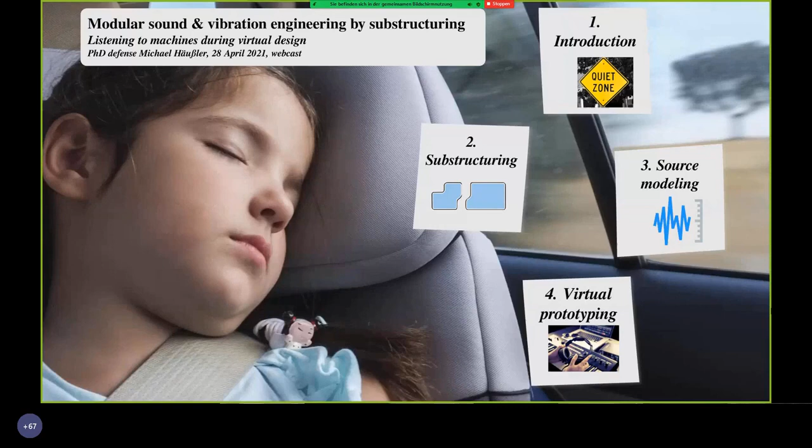Thanks for the kind introduction, and welcome to my PhD defense talk, which is about modular sound and vibration engineering.

If you look at the background picture here, this nicely conveys what we want our cars to be like. They should be our comfort zone, our safe space, so we can enjoy the ride, and eventually our kids can sleep. What we don't want is to be disturbed by any background noise of machines running in the car.

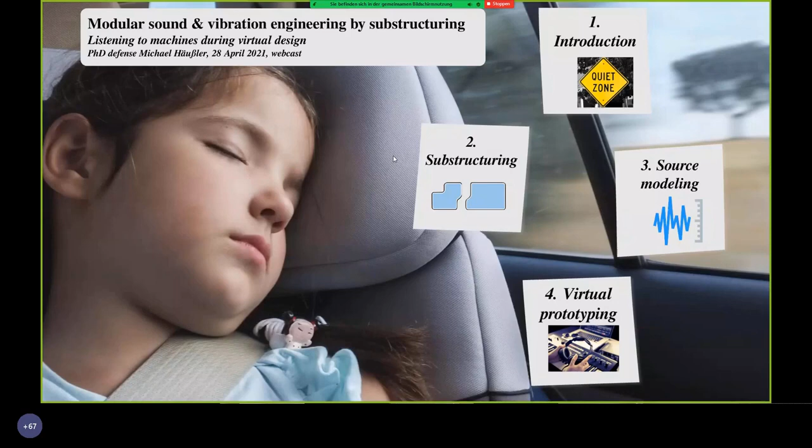I'm going to give you a quick listening example of that now.

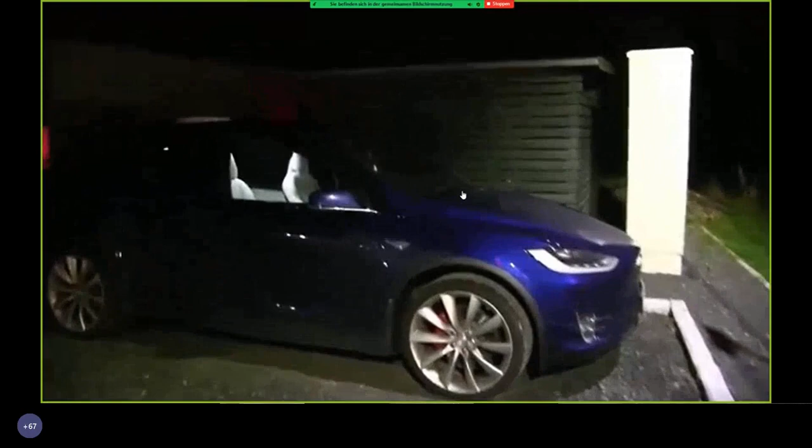Hi, I'm at the supercharger in Elverum, and right now I'm getting about 100 kilowatts. And you hear this noise? This is completely normal because we are receiving so much energy so fast. So the compressor are working on high gear. You can actually feel the heat coming out here. Yeah.

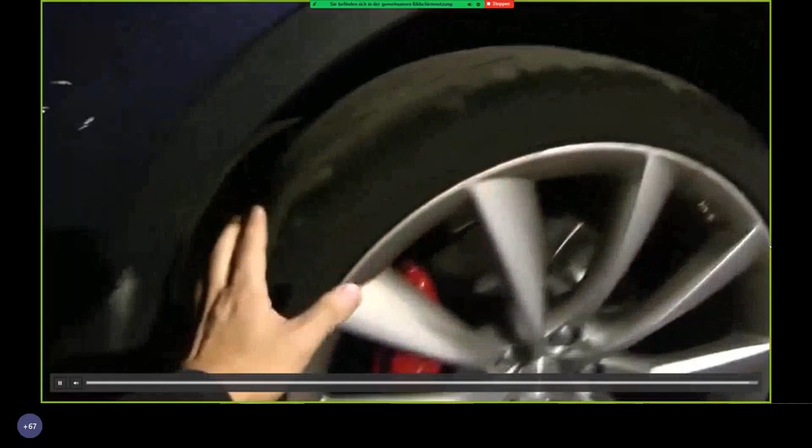So this YouTuber is perfectly right. Unfortunately, the cell heating rate goes up quadratically with the current when charging or discharging the batteries, so we kind of need this component in every vehicle.

Now the art of acoustic engineering is really to think about how do we connect this thing to the vehicle and isolate the sound in order to not hear it. But it goes further, because you cannot just add excess material which is not required. If you think about acoustic countermeasures, you could think about intermediate masses and sound insulation capsules, but they all add weight, costs, and excess resources that you need.

If you then think about the yearly production rates of popular vehicles, you can see that this is actually an important point to consider, and to get your models right for getting a good design.

To make things concrete, I'm showing you here the setup of the virtual prototype, which I'm going to show you at the very end in my PhD thesis. This was a climate compressor that was isolated from the vehicle with a double isolation, so you've got two sets of rubber bushings and an intermediate mass called a carrier in between.

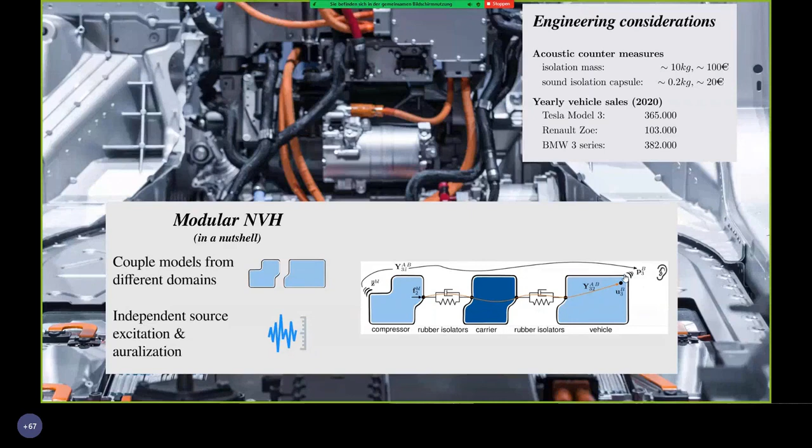What you really want to do is take individual component models, which you model with the most convenient approach, and virtually couple them together in order to predict the vibration and sound transfer path all the way up to the driver's ear. You also need an independent description of the source excitation of this component, which in this case is the compressor. This both transfers sound and vibration over the structural connection points and also over the airborne path by radiating directly from its housing. Then you want to do some signal processing in order to listen to your design virtually in the computer. This is what I'm going to explain in more detail now.

So let's jump into substructuring. Imagine you've got a model of structure A and structure B, and you want to couple them. There are really only two coupling conditions: you've got the vibrations and forces acting on the interface on structure A and structure B. To couple them, you have to ensure two coupling conditions — first, that they do the same vibrations on the interface, and that the forces acting on the interface are equal in magnitude, but

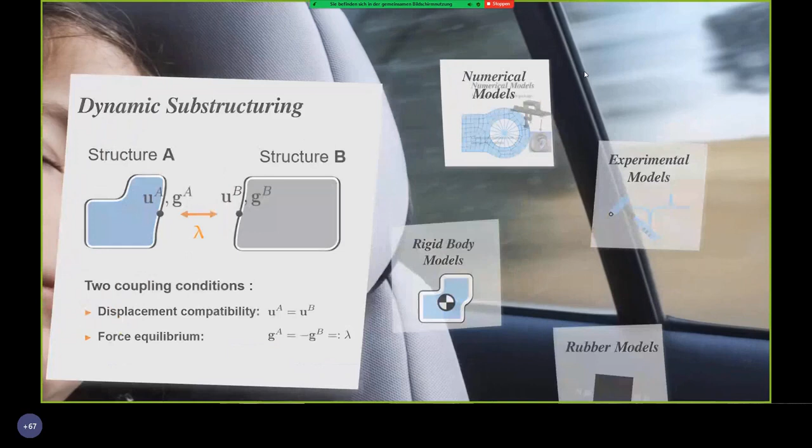opposite in sign. So this is really just Actio ist Reactio from Mr. Newton. This is not so difficult, but the question is really, how do I get a good model of any substructure? The first thing that comes to mind is a numerical model, and you can obtain a description of your components by any standard finite element or multi-body simulation package.

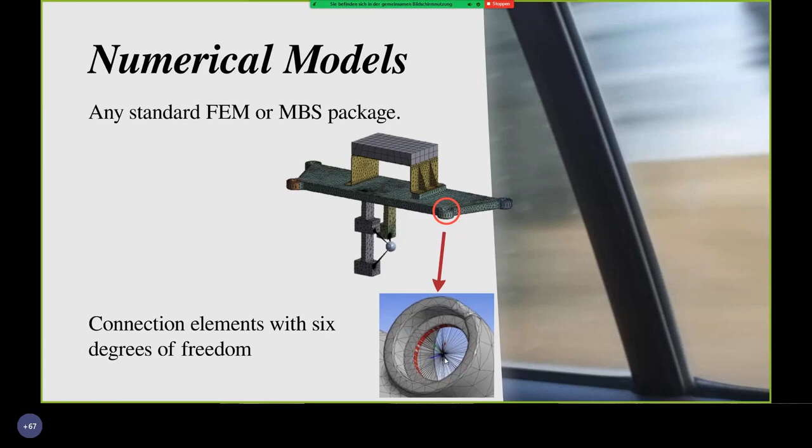As I've shown here in this example with a finite element model, you can take your connection points at the interfaces and place one of these rigid elements here. These are like virtual points in the middle of the connection, with 6 degrees of freedom, where you can enforce the coupling conditions with the next structure.

What you can also do, if you have a complex structure that's too difficult to model accurately, or you just don't have a model, is take an experimental model. This seems straightforward at first: just use vibration sensors and force sensors and measure the relation between forces and vibrations at the interface points. But to get a description you can couple to other models, we use something called the virtual point transformation, which is really key to most of the things I'm showing here.

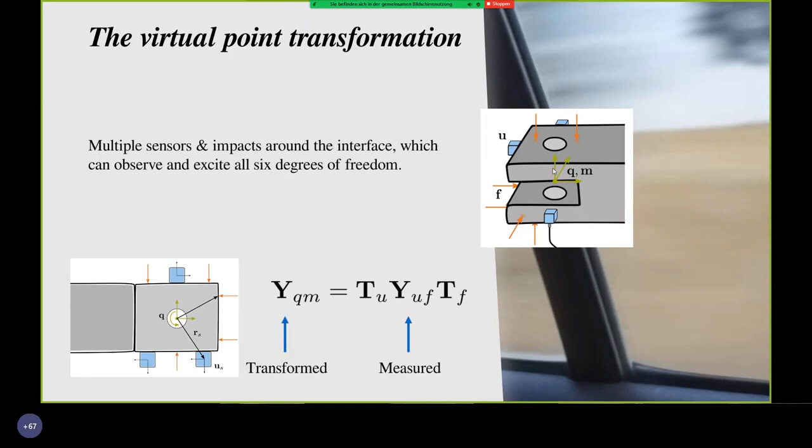So what you do is equip your connection points with a couple of sensors, perform a few impacts with your force-sensor-equipped impact hammer, and measure a transfer function. By knowing the geometry and position of your impacts and sensors, you can use transformation matrices to transform your measurements to a description at a virtual point in the middle of the connection point. This is then compatible again with, for example, your finite element model.

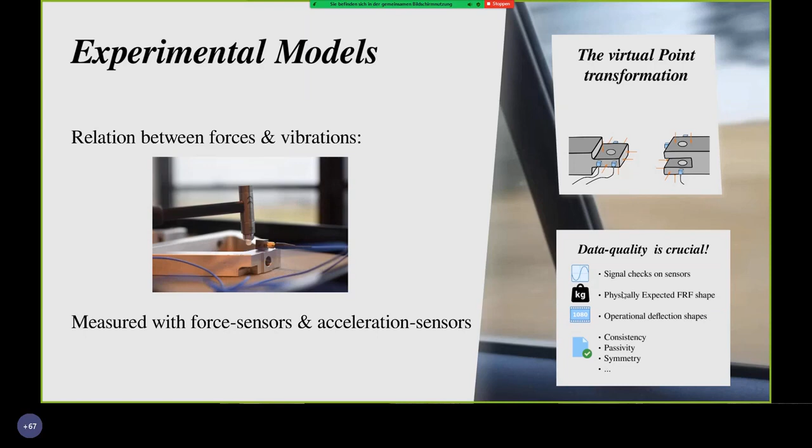The real catch, and what I want to stress, is that data quality is crucial. You want to do all the checks at your disposal to ensure you have an accurate experimental model — we've learned the hard way what can go wrong. But otherwise, this is a really handy modeling approach for a substructure, and rather quick if the structure already exists. What's even quicker, if you have a really simple structure in your transfer path that can be modeled as a rigid body, is to just go ahead and model it as one.

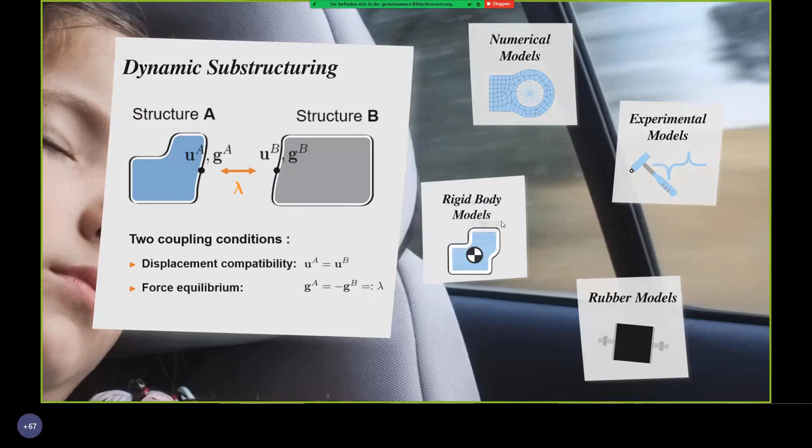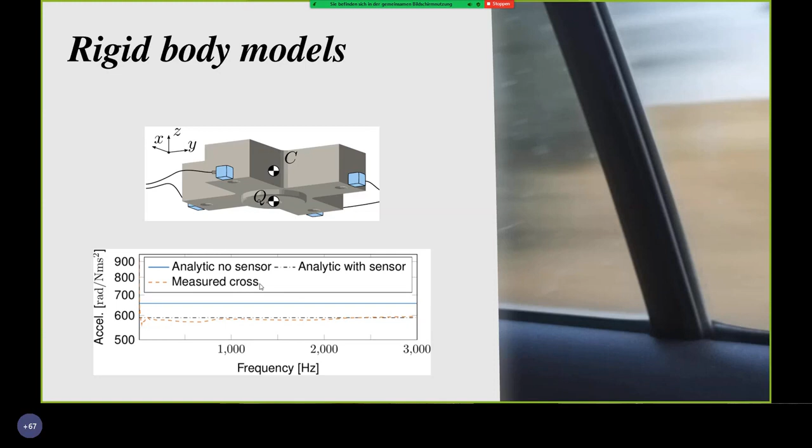Imagine one of these crosses here — they're basically rigid in your frequency range of interest. You just define a general coupling point on this cross, and we formulated the equations so they nicely fit into this substructuring framework. The only thing I wanted to stress is that it's important to also consider the added mass of these sensors. If you do this, you can get an almost perfect match between your rigid body model and a reference measurement. That turned out to be very handy for some simple structures, like these crosses you can use for testing.

And then lastly, you often have rubber isolators in your sound transmission path. Here it wasn't exactly clear to us how to model this at the beginning of my research project, because you have quite a few challenges with these rubber models.

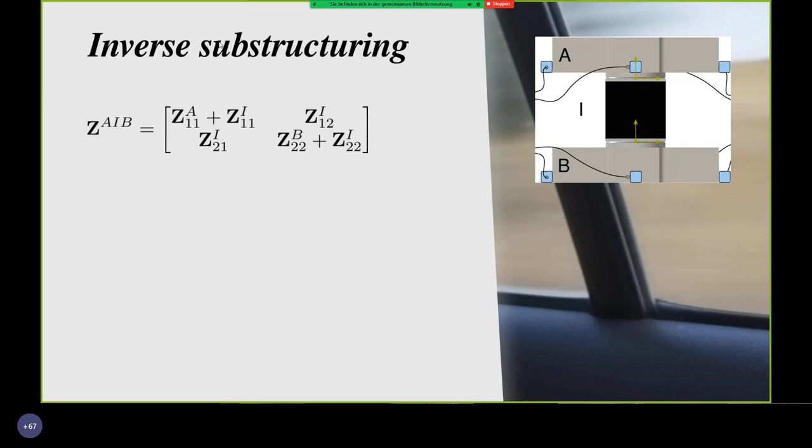One approach we found in the literature was called inverse substructuring, and the idea is quite simple. Imagine you take two of these crosses I've just shown you, attach them to your rubber bushing, perform your measurements on these crosses, and transform them to two virtual points with 6 degrees of freedom at either coupling point of the rubber bushing. You end up with a dynamic stiffness matrix of this assembly. Inverse substructuring uses the fact that the off-diagonal terms are only a property of the connection element, which is the rubber isolator.

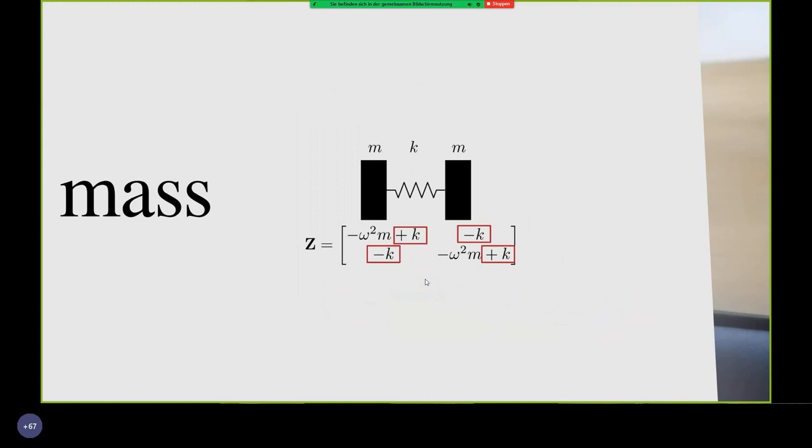To come up with a model for this full isolator, you assume a simple topology and negligible mass for the rubber isolator. To make things really simple, if you think of two masses connected by a spring and look at this dynamic stiffness matrix, you can see minus the stiffness on the off-diagonal, and then recreate the on-diagonal term you want. So basically, you make this simple topology, degree-of-freedom-to-degree-of-freedom connection assumption with negligible mass, and then build your rubber isolator model from that.

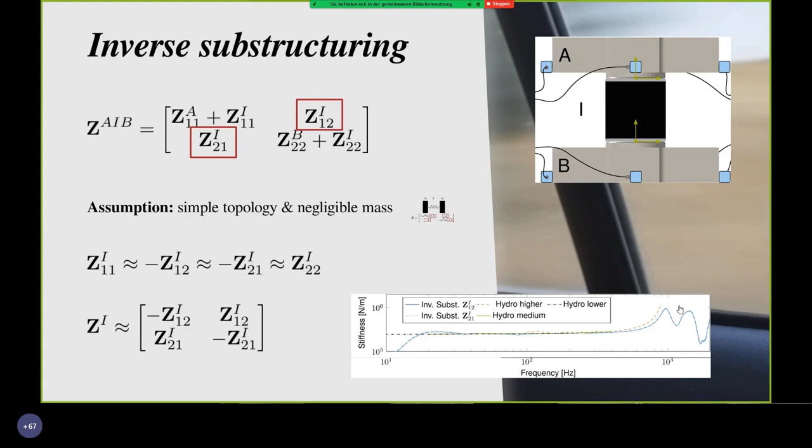If you look at these off-diagonal terms, which you can validate with measurements on a hydropulse measurement machine, you get a pretty accurate match in the determined stiffnesses. What's also interesting is that toward higher frequencies, you can see dynamic stiffening and weakening effects, which are due to internal continuum resonances in the rubber bushing. These cause problems sometimes with gearbox whining and electric motor sound — something we've already seen in other projects.

But as I said, you make quite a few assumptions here, so why not just go ahead and use full decoupling? As I've just said, we can model these crosses quite easily as rigid bodies, and we can then just decouple them from the measurement taken on the coupled assembly.

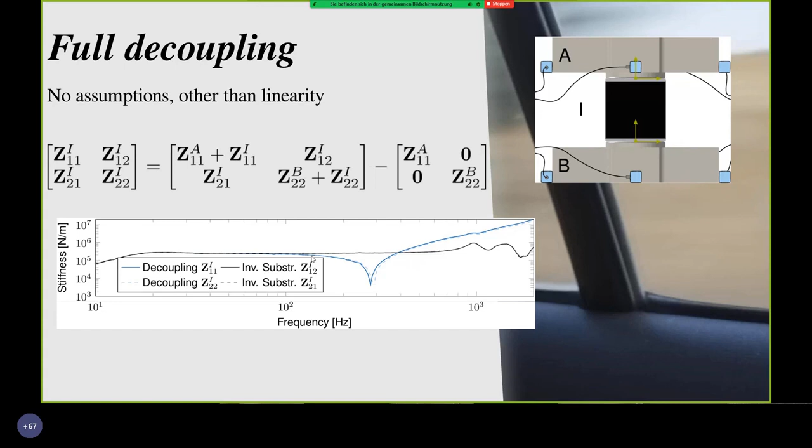And then we get the rubber bushing model, and we have no assumptions other than linearity. If you do that, you can look at these on-diagonal terms and compare them to the off-diagonal terms, which should be equal under the assumptions of inverse substructuring. But you can clearly see that this is only true up to an upper frequency limit, because after that...

...the mass effects of the rubber bushing kick in. But the important point is really to see how these models perform in substructuring.

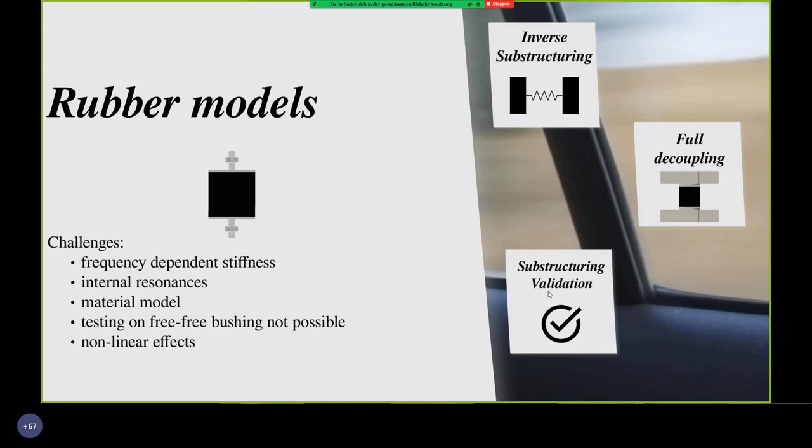So what we did is set up a small validation measurement where we used these bushing models for predicting the FRF of a new assembly. You can see that with this decoupling approach, you get an almost perfect match in your prediction with the reference measurement. And here, with this inverse substructuring approach, we've tested quite a few different variants of this method, but you can still never get it quite right.

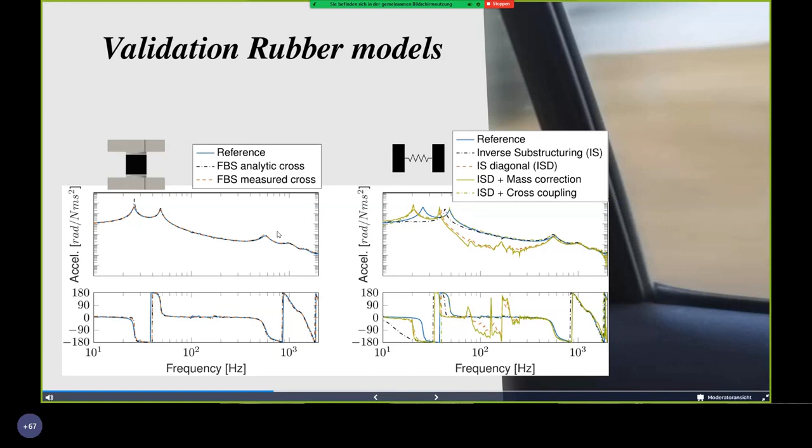So we were very happy with these results, and we use them a lot also in our daily practice and in the rest of this thesis.

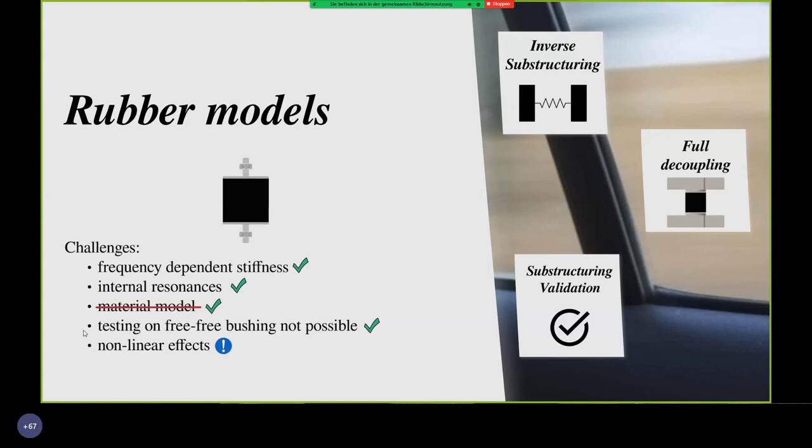So with these models, we've covered quite a few of the challenges. We include the frequency-dependent stiffness and internal resonances in the bushing. We got rid of the necessity to have a material model because we just took the component as it is and modeled it. The only thing that's missing now is nonlinear effects, but there is a lot to come by bright people working currently at the chair, also in this direction.

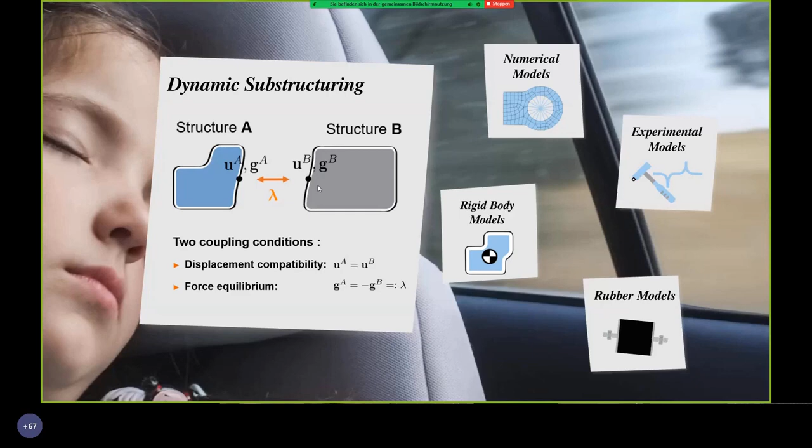But if we look again at the high-level picture, we've got quite a few models at our disposal, which we can couple to each other in order to simulate a complex transfer path in a vehicle. So the last thing missing is how we model the source excitation. And this is what I'm going to talk about now.

So what you have in your vehicle: you've got your source A, and it has some internal forces which are exciting the system, and these vibrations are transferred with the transfer function of the full assembly AB to sound and vibrations on your receiver. The problem is that these internal forces are first of all complex to model, so you've got maybe unknown parameters, or it's a supplier part where you don't have a model of.

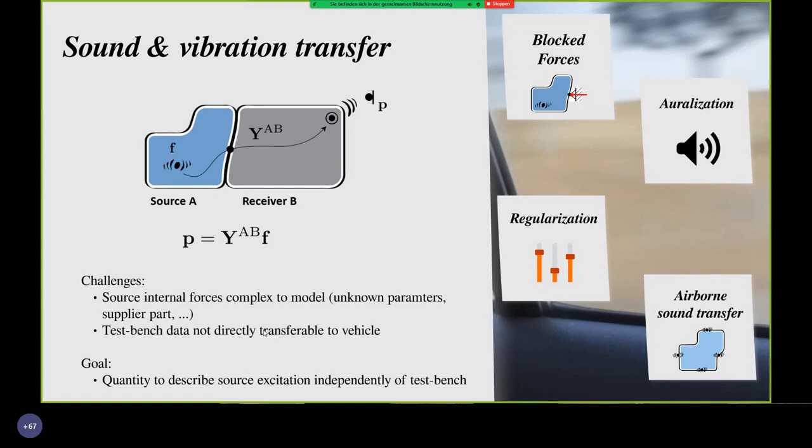And even if you take the component on a test bench, you need some sort of data processing to make these results transferable to what you're going to have in the final vehicle. So what you really want is an abstract quantity to describe the source excitation independently of the test bench. And this is where blocked forces come in.

I'm going to explain you in a nutshell what these blocked forces are. If you really think about them, these are the forces that, if your source is in operation, running this component, and if you would apply the blocked forces on the interface here, then they would block any vibration on the interface. So the interface is completely blocked, and therefore you would not have any vibration and sound left on the receiver.

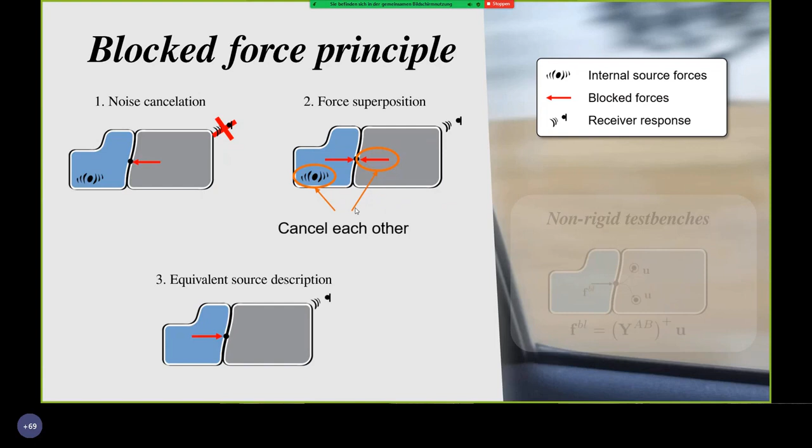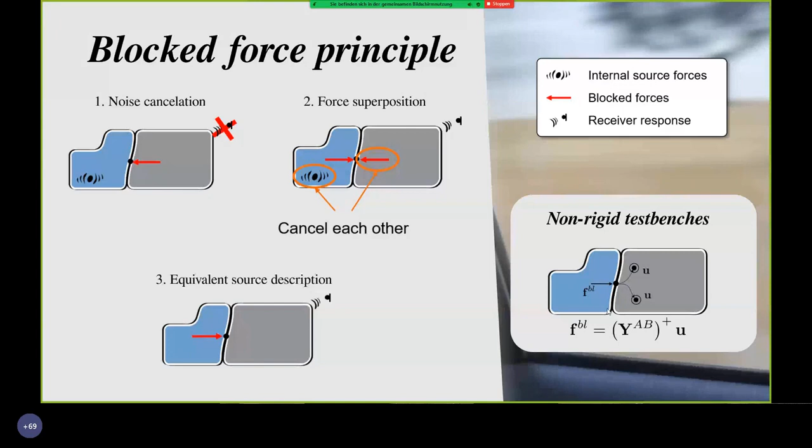Okay, so that helps in thinking why they work, but of course we can never build a really rigid test bench. So what you do in practice is attach your source to a flexible test bench, record the vibrations on this test bench, and then inversely compute what forces would have caused this vibration.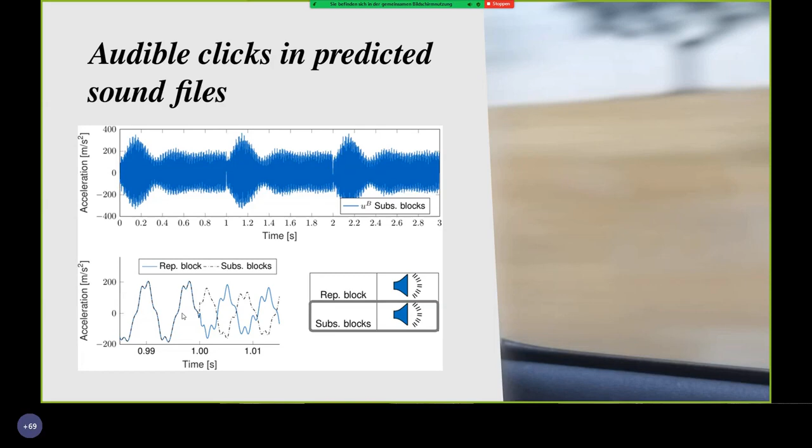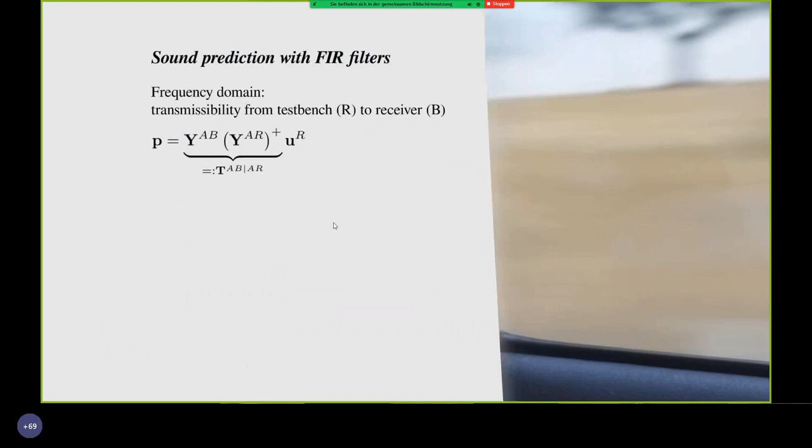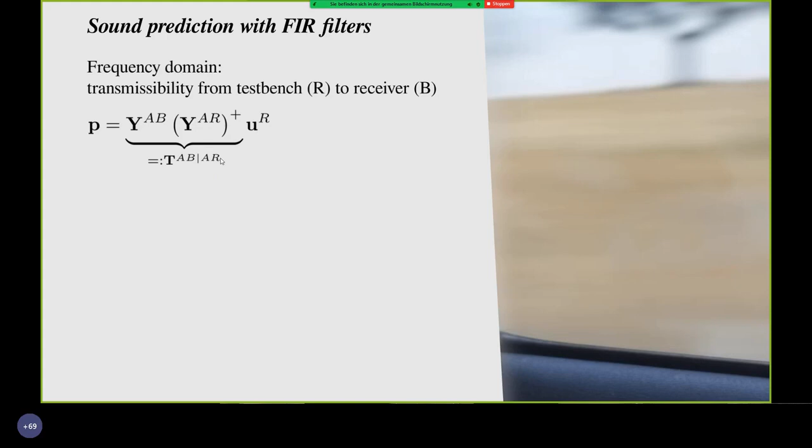So we have tested quite a few methods of how you could get rid of this. One that I'm going to show you here, which I think is generally well applicable, is that you take all the operations you have in the frequency domain for coming up with your prediction at the driver's ear and cast that into one transmissibility matrix. Then you transform this transmissibility matrix to the time domain, to a FIR filter.

And then I'm directly taking my recorded time signal from the test bench and convoluting it with this transmissibility matrix. Therefore, I end up with my sound predictions directly in the time domain, to which I can listen. Here you really don't make any assumptions about the nature of this excitation signal, other than that you have linear systems. And if you listen to that...

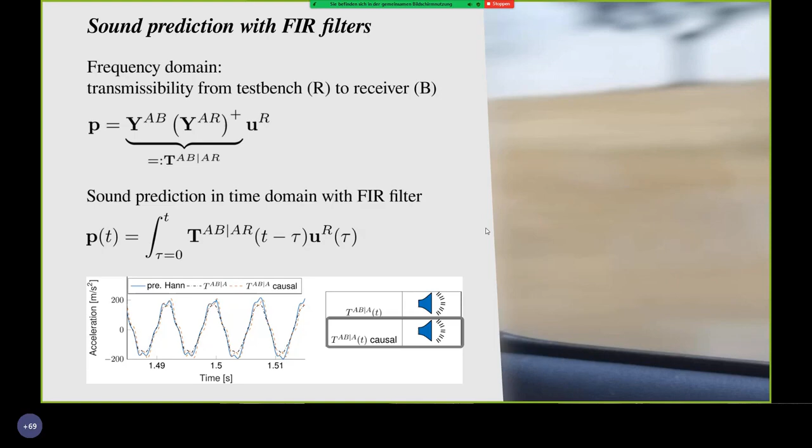You can hear that you got rid of these artifacts. All right, so now we know how to model our source and then listen to the predictions, but there's a last topic in order to have clean predictions, and this is the field of regularization.

Regularization is really concerned with this amplification of measurement noise that you have in this inverse computation of the force. So imagine this very simple system of just a spring, and you measure the vibration here at this point, and you want to infer what the force was that caused this vibration. But unfortunately, you also have some measurement noise in your vibration signal, so an error, e_u.

So the estimate that you have of this force is going to be made up of two components: first, the true force, which you want to identify, and then also this error component. And this is no problem as long as this error component is small compared to the true vibration.

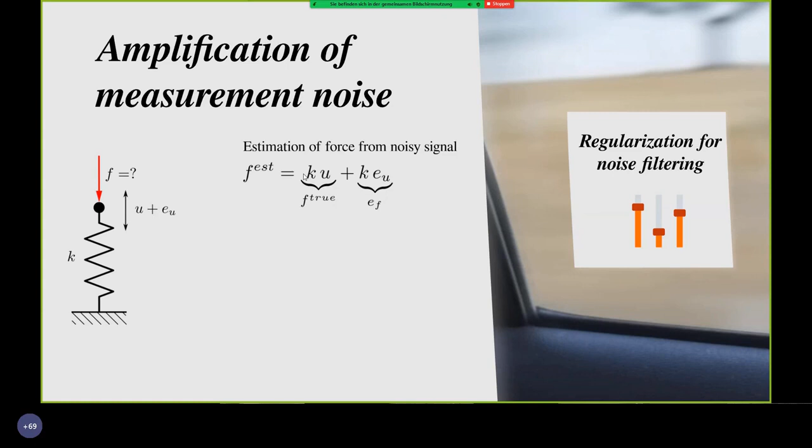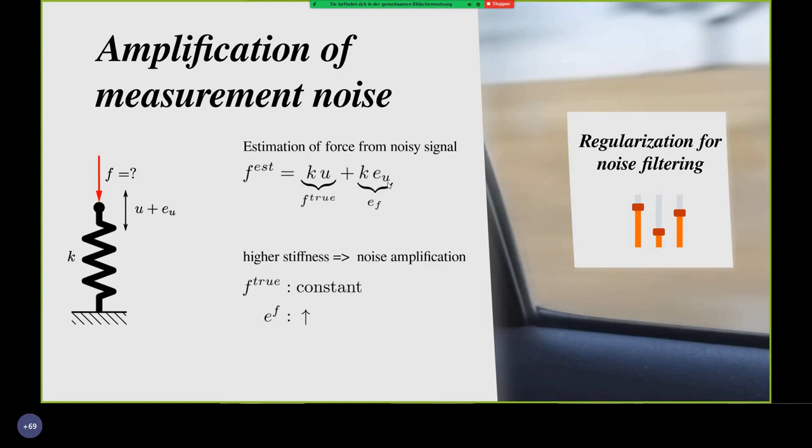But imagine you've got a very stiff system with a very stiff spring. Say your force stays constant, but the error or measurement noise in your vibration signal is typically independent of the overall level. So this error component in your computed forces increases quite a bit, and this can give problems which are actually audible in your predictions.

What regularization is doing is filtering the forces in these stiff directions. We've tested multiple methods for using this, and especially one where you use the signal to noise ratio for determining the filter factors turned out to work very well for the compressor. So let's listen to a validation measurement on a test bench.

All right, now let's listen to the regularized prediction. Now that sounds very similar to the validation measurement, but now let's listen to the standard inversion without regularization.

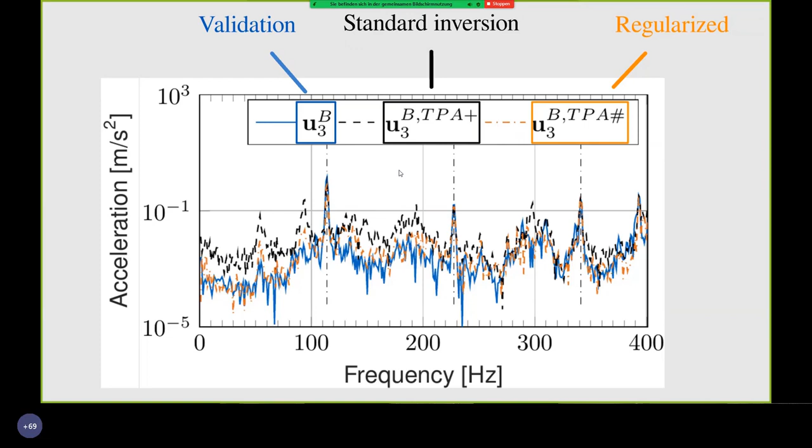So here you can hear a lot of background noise and rumbling, and this is really at the resonance frequencies of your receiver, this sound pollution that you hear. What really happens here is that you've basically amplified your measurement noise twice. You have once amplified it in the stiff directions of your test bench, and then just by chance, because you're unlucky, you hit a resonance frequency of your new receiver and amplify the measurement noise again. And this can yield spoiled sound predictions.

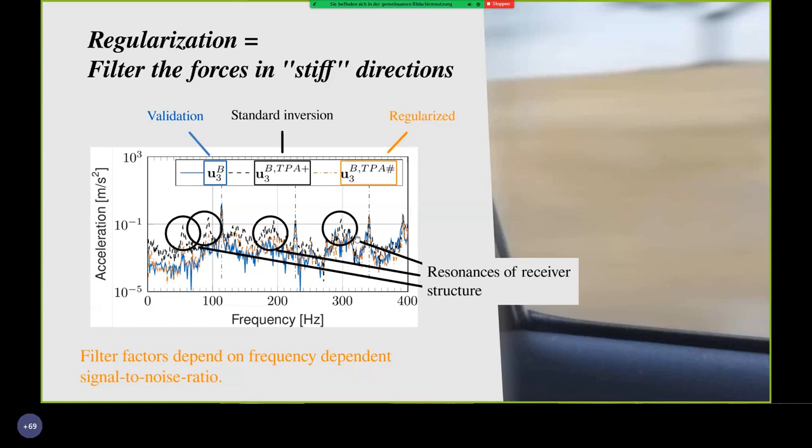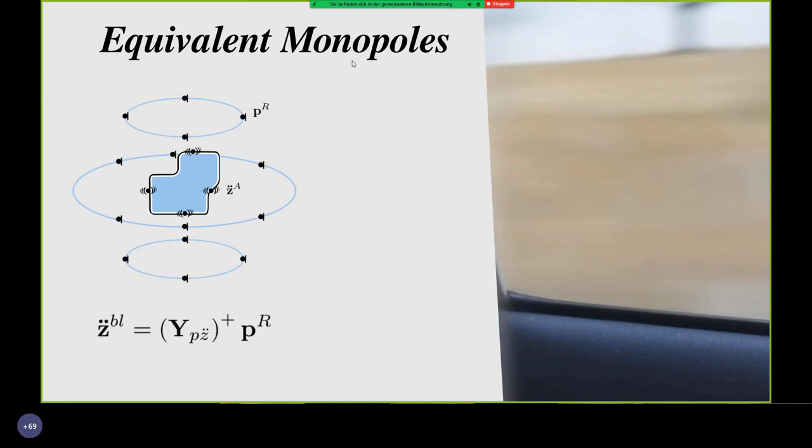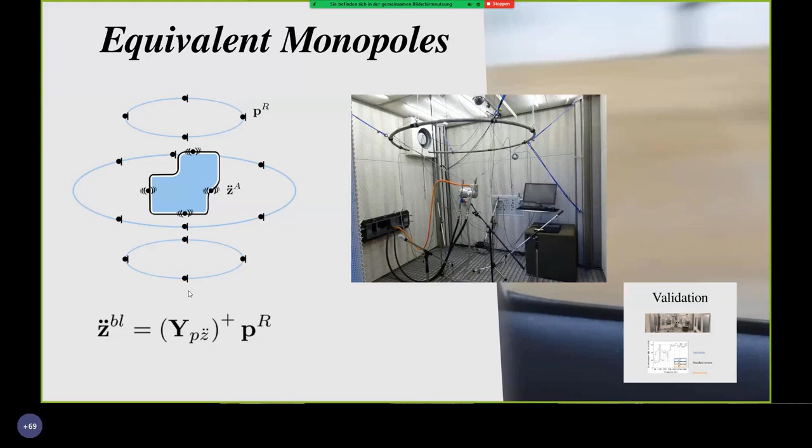All right, so this was insightful and good. And then the last thing, I'm going to go over this very quickly: since the e-compressor is radiating sound also directly to the air from its housing, we described this transfer path with equivalent monopoles. So basically what you do is you hang up your source component, which is surrounded by many microphones, and then you also inversely compute an equivalent source quantity describing this airborne path.

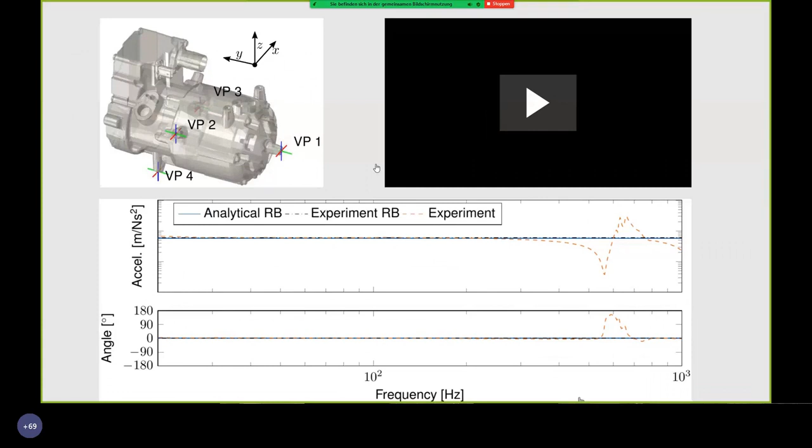Okay, and now if we look at this, we're really finished with the source description, and together with substructuring, we can now really go to the fun part where you use this in a virtual prototyping approach. So here again is this design of an electric vehicle prototype where the compressor is doubly isolated from the vehicle. I'm now going to go quickly into the individual models we used for modeling this transfer path. The compressor was described just as a rigid body, so I'm showing this here in a small video.

So you can see here that you have these 4 connection points where the compressor is attached to rubber bushings, but in essence, this is just a rigid body. The rubber isolators are described with the method that I've just explained you before.

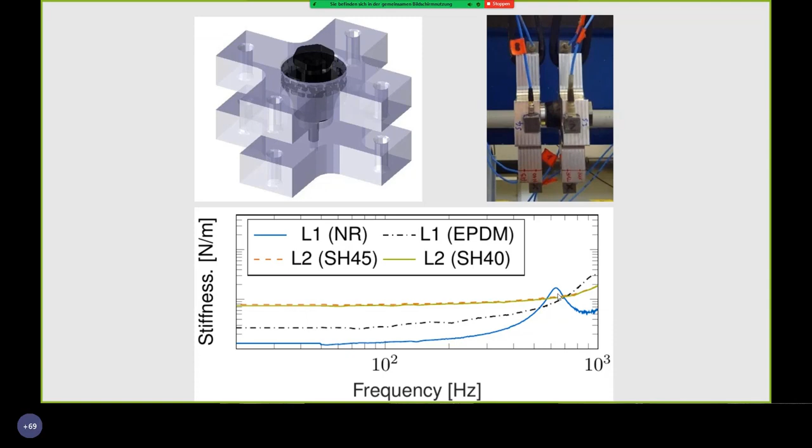These are 4 different variants for the potential rubber isolators that we could use with different materials. You can see here what is very interesting, one of these internal anti-resonances, where one rubber bushing, which is supposed to be the most flexible one, is actually stiffer than all the others. For this intermediate mass, we used a finite element model.

The second stage of rubber isolators were described with just the same approach as the previous ones. And for the vehicle, we used an experimental model.

And then we've also measured the transfer path to sound pressures and microphones in the vehicle. The only thing which is noteworthy to mention here is that you need to consider the added mass of these crosses, because especially at higher frequencies, if you don't decouple this mass, then you get quite different and actually wrong transfer functions in your model.

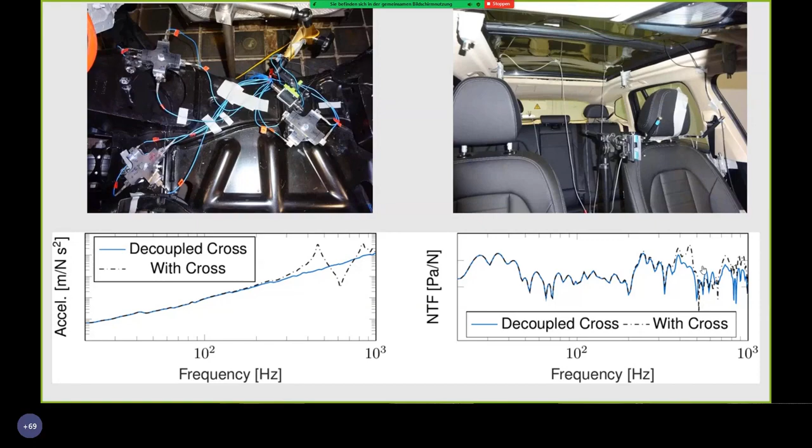All right. So with all these components, you can see that this is actually quite flexible. You can choose whatever approach fits your design best for the individual components. And now we can make predictions for what the transfer function all the way from the compressor to the driver's ear is going to look like.

And we've tested this design physically. And what you see here is a validation measurement for an input on the compressor and an output on this intermediate mass. And what you can see here is that the substructuring result fits the reference measurement quite good. Only here at higher frequencies, and I've also plotted the coherence of the reference measurement down here.

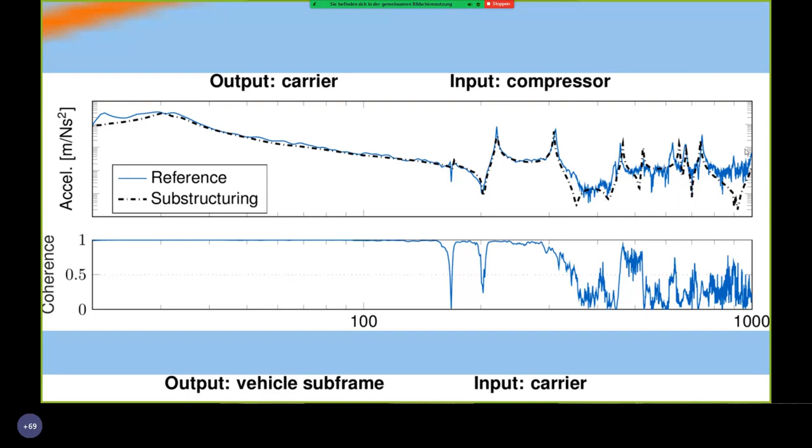You can see that, well, you cannot apply enough input energy to your system to really measure this transfer function. And with substructuring, since you've modeled all your components individually or measured them with a good signal to noise ratio, you can actually make predictions at frequency ranges which were previously not even possible to obtain, even if you have a full prototype. So that was very interesting.

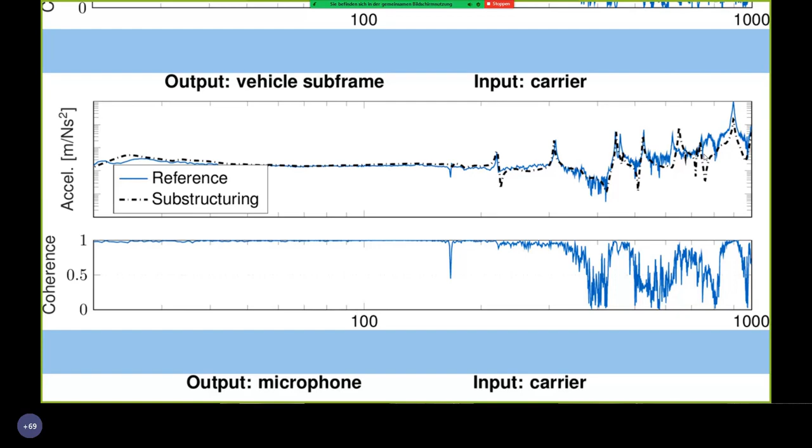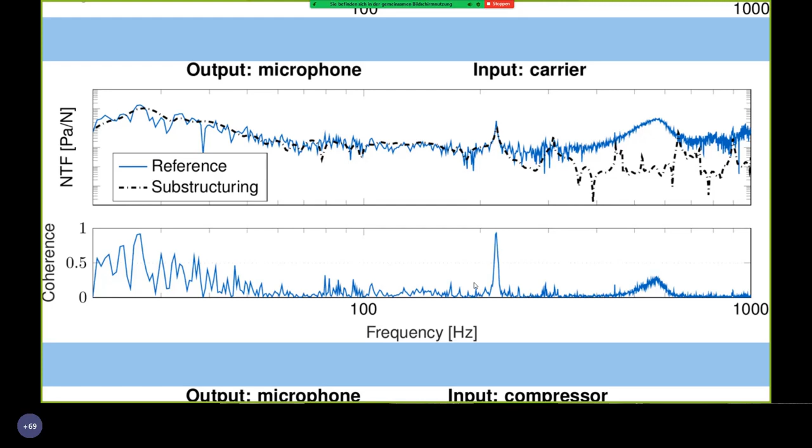So here you can see a similar thing for an input on the carrier and an output on the vehicle subframe. And here you can see an input on the carrier and an output on the microphone in the driver's cabin. And here you can really see that it's almost impossible already to get a good signal to noise ratio. And yeah, so that was very rewarding.

And then you can, with your source description, go ahead and make noise predictions for what's going to happen inside of the driver's cabin. So what I'm showing here is a low speed of the compressor and a high speed of the compressor. And you can see at lower speeds, if we took a validation measurement, that this one is almost entirely dominated by the structure-borne sound.

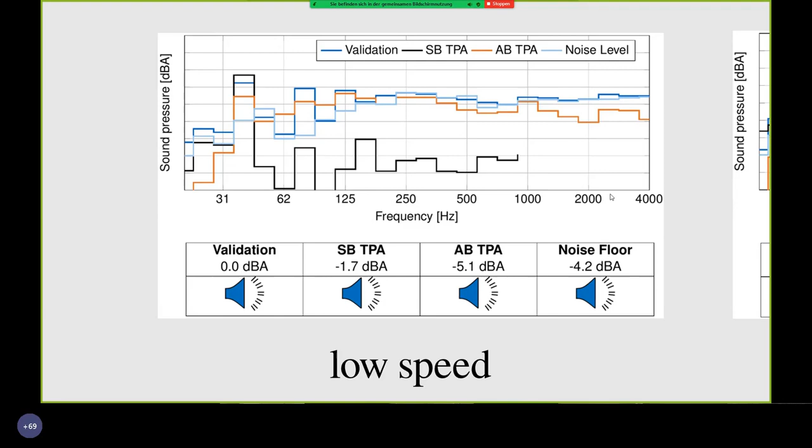And also, if you listen to the interior sound, you can hear this. So that's the sound from within the vehicle, and this is the prediction for the airborne sound now.

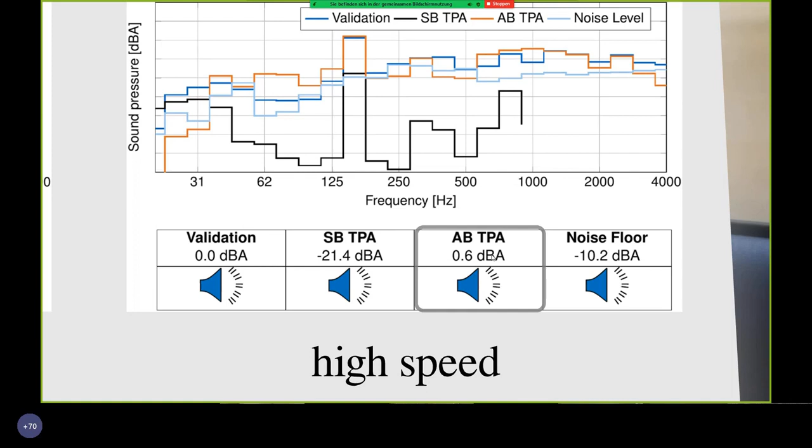Right. So the learning in this case was, well, the structure-borne isolation is good, maybe even too good, and we would like to find a less complex design, which uses less material, is not that heavy, and where the airborne path is actually dominant and really sticking out of the noise floor. And you might want to consider wrapping your e-compressor into a sound insulation capsule.

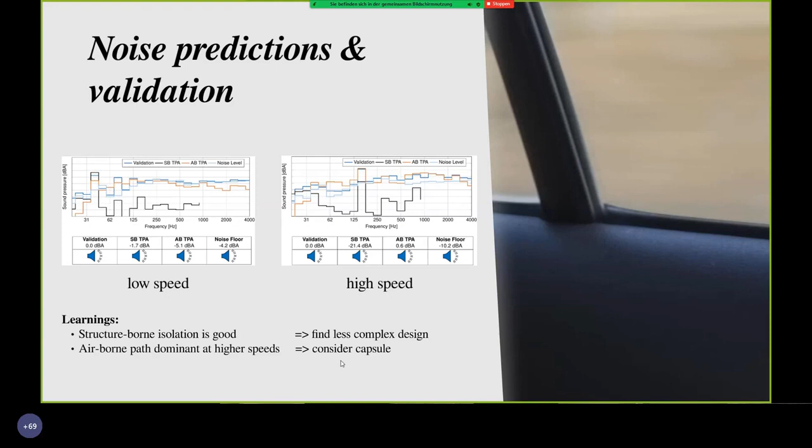Okay, and now that you have this flexible model, well, then it's natural to apply some virtual design modifications, like modifying the finite element model of your carrier here, or just changing the rubber bushing stiffnesses, or play around with your design and see what happens if you leave out bushings.

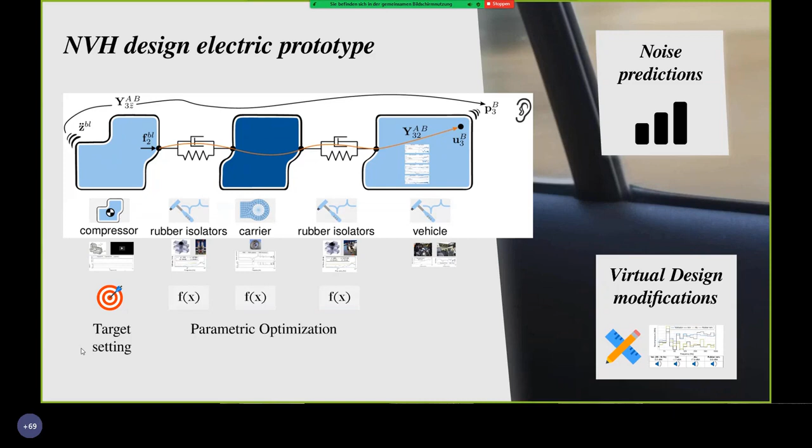And the last thing which we did in the last chapter, which lends itself naturally, is that you parameterize your individual models and then let an optimization algorithm find the optimal isolation mechanism for your design. And what we also see in industry a lot now is that you use the description of your component and these blocked forces to agree on targets with your suppliers.